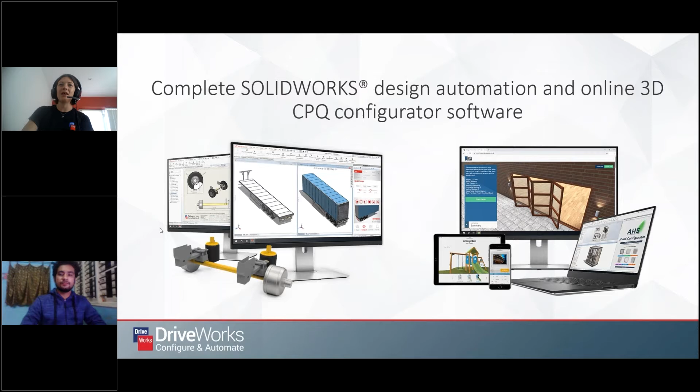DriveWorks is a software solution that allows you as engineers to set up your own design automation tools, and then using that same technology, create a way to specify new products or versions of your product. We're going to talk more later about these different versions of DriveWorks, but it basically allows you to automate your whole design process and make it a lot smoother and easier.

So today we're actually going to focus predominantly on DriveWorks as a design automation tool. It can be used as a CPQ tool as well, so you can do online selling and have an online platform with DriveWorks, but that's the high version of the software. Today we really want to focus on the core design automation, and how you guys can get started automating your design process as soon as we finish this call and start saving some time.

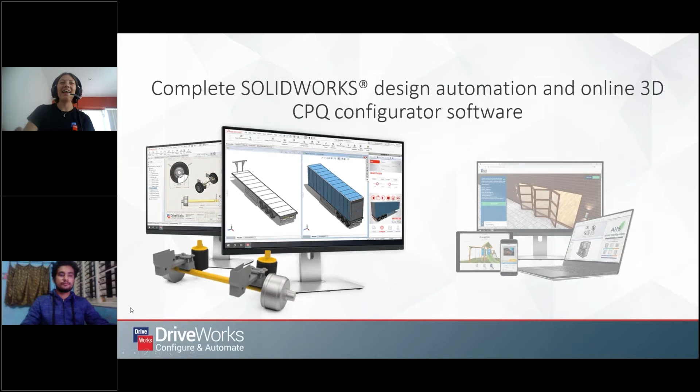DriveWorks Express is free for all SolidWorks users. It's included inside every license. This means that you can go into SolidWorks, activate your license, and then just start using the software straight away. So all you need to do is a 6-step process: open up SolidWorks, go to Tools, Express Products, DriveWorks Express. You click on the link for My SolidWorks, you'll get an activation code, paste it into the box, and then you could just start automating from there. It's really easy to do, but I'll make sure I send out further information after the meeting so you can get started straight away.

So how does it actually work? It's entry-level software, the basics of design automation, so it's really easy to get to grips with. But it basically allows you to drive values into your dimensions. You can suppress and unsuppress features, or even delete whole parts from assemblies if needed. It's perfect for small projects because it's very simple to set up a project, and it does the 3 core functions of design automation.

So that is capturing your information that you want to change, capturing those dimensions such as length and width, capturing different features, so it might be materials, something like that - those different aspects that you want to drive later on. You can even automate the custom properties or drawings for each new variation of your model.

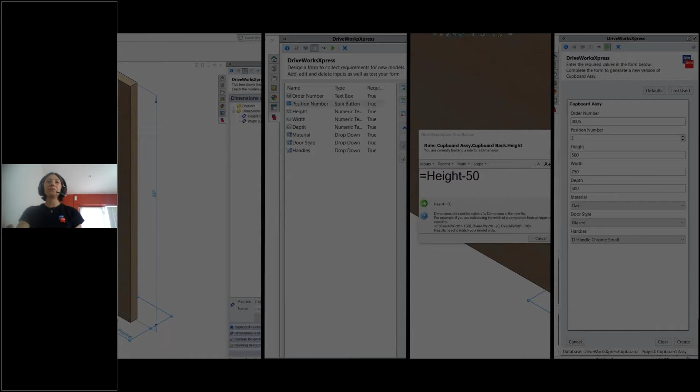So that was quite a whistle stop tour, so I am going to go into it in a little bit more detail. As I said, the first step is capturing those design parameters - capturing your length, capturing your width, capturing whatever you want to change on your model. This is basically telling DriveWorks which components you want to create new versions of and what you want to control or change inside of those components.

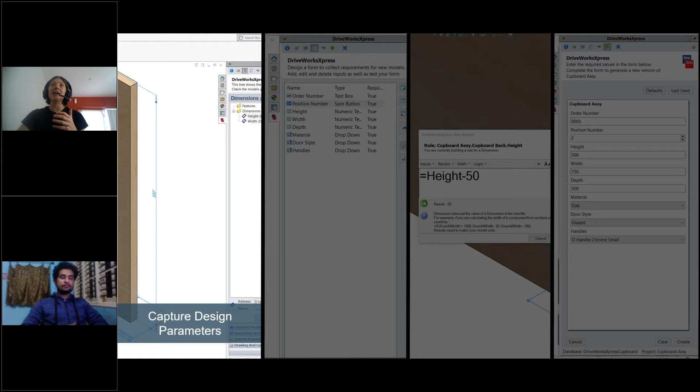You'll then move on to creating your input form. So again, those are the options of what you're going to have on your form. Are you going to have the order number, so you know what order number is going to be changing each time? Is the option going to be the height? Is it going to be the width? Is it going to be the depth? What are those controls as well?

For example, you might design doors as your product. You might know that your doors can never exceed a certain length, so they might never be able to exceed 3 meters, and can't be smaller than 1 meter. So you can put those controls in to say that the option is going to be between 1 meter and 3 meters, and your customers or whoever's inputting the values in the form can select between those options. So it helps there with error control and that kind of thing.

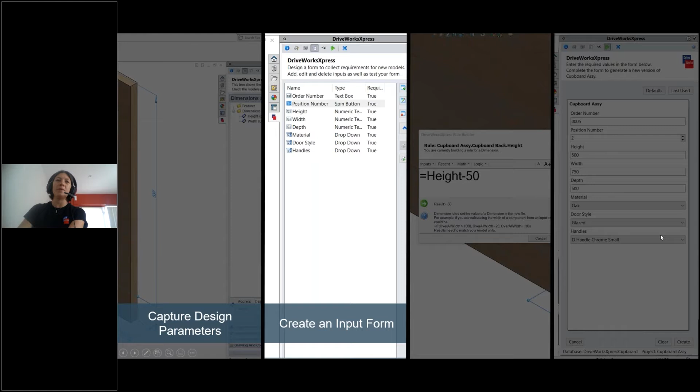There's also different types of form inputs, which I'll show you in more detail during the demonstration. The next option is actually writing your rules.

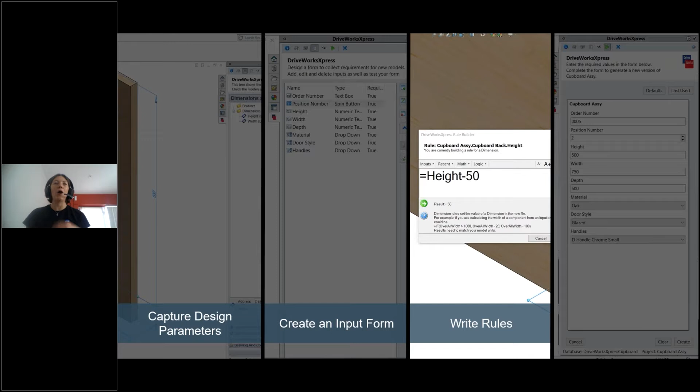Rules are what DriveWorks is all based on. It's the integral part of DriveWorks, very similar to Excel rules, so you might have things like if statements or different types of logic. It's essential for matching up those captured design parameters with the inputs on your form, and then being able to create the full DriveWorks project. When we go into the demonstration, it'll become a lot clearer how rules actually operate within DriveWorks.

And then the final stage is just running that project as many times as you like to create all of those wonderful new variations of the same model that you originally started out with, but doing it a lot faster.

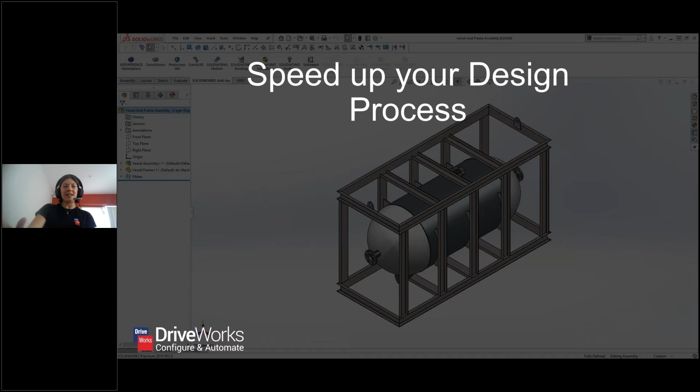So how is this going to actually benefit you? The first one is it speeds up your design process, which is very important. We're all very busy people, so we don't want to be spending time doing really boring, repetitive tasks. Before DriveWorks, you might have that initial inquiry that takes X amount of time, but then the actual design process could vary from 1 or 2 days, longer or shorter. It can be quite a lengthy process.

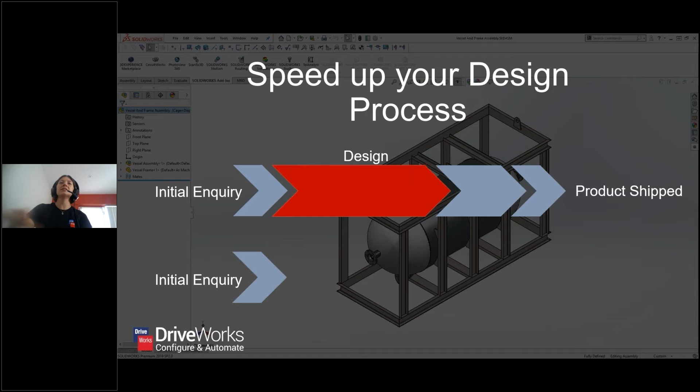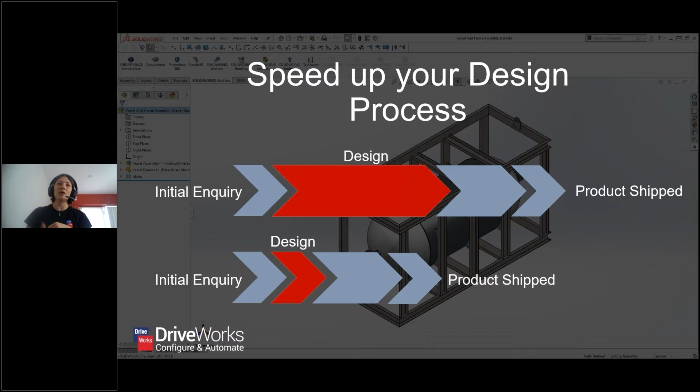And then obviously you've got to get the product shipped. Whereas if you have DriveWorks and you've automated this process, your initial inquiry time takes the same, but then your design process is cut down massively, which means you can get your product shipped faster, which means your customer is a lot happier because you've managed to get them their product a lot quicker. It means you can then do more designs, more research and development, get more orders out, so your boss will be happy because you've managed to sell even more this year. So it really does speed it all up.

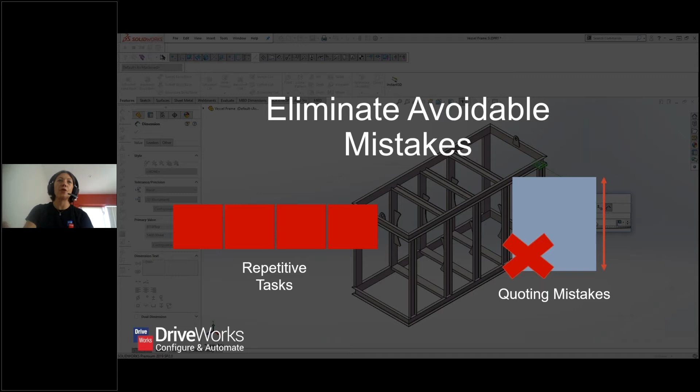The next one is eliminating those mistakes. We are all human beings and we can make mistakes. So if you're manually designing everything, it's a lot more likely to make mistakes, whereas if you use DriveWorks, it's an automated system, so it's not going to make mistakes. Repetitive tasks also make mistakes happen, like quoting mistakes. These can be costly to a business and really affect the time taken to get those models out and your products created.

So the last one is freeing up engineering time. As engineers, I imagine you all really enjoy designing and doing fun tasks, but you don't want to do those boring, repetitive ones every single day. Get rid of those, and then you can do all the fun things you originally studied to do, like working on new projects, developing existing products, and automating even more. Getting that fun stuff done is very important, and that's what DriveWorks will allow you to do.

Moving on to DriveWorksXpress in general, this is another view of how it actually works. As you can see from the image, we're inside SolidWorks. We've got our product, a scissor lift. Say that's our original model, and over here you can see that from that original project we can create all of these different variations instantly using DriveWorks because it's automated the whole system.

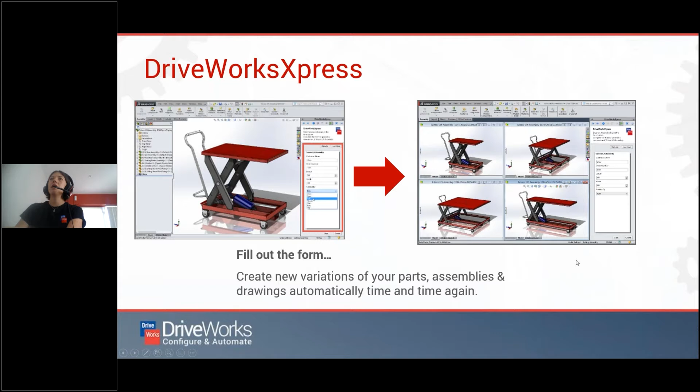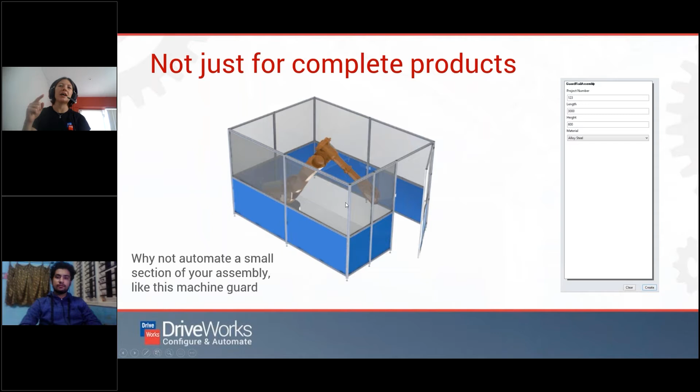DriveWorks isn't actually just for complete products, but it might be that you need to automate a small part of your product. For example, you might need to automate the machine guard because that's something that only changes a little bit every time you have a new model. So you might want to automate that, and even if you just automate that process, you're still saving yourself a lot of time because it's only changing by a bit of length or width each time the machine changes, but it means you're not doing that boring task of redesigning it every single time.

So again, even if you can't automate your whole product, just automating a little bit and saving yourself a little bit of time will really go a long way in the future.

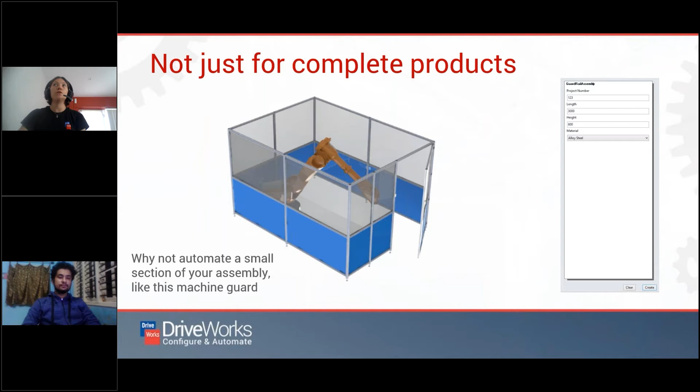So now I've talked at you quite a lot about DriveWorks, but let's actually see it in practice. The best way I thought to do this was to record the video earlier of me doing the demonstration, so it's easier for me to talk over it, and I know there's going to be no errors because I've already done it.

Hopefully you can all see the video now. Again, we're inside SolidWorks and we're going to get started. So I'll just talk you through all of this. I'm inside SolidWorks, and I've already activated my license of DriveWorksXpress, as you can see here, but it's also found inside Xpress Products, DriveWorksXpress.

Now, if you can remember from earlier in the presentation, the first thing that I'm going to need to do is capture those design parameters that I want to change every time. So that's the first thing we're going to do.

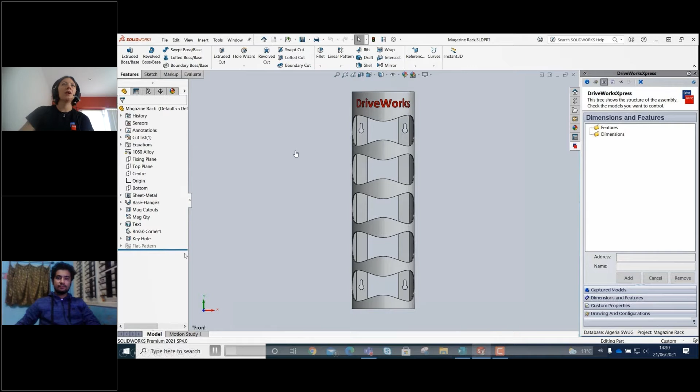I'll go over to the design tree here. I've got my captured models, my dimensions and features, and what I'm going to do is double click here because I want to capture the width and the depth. They're the two things that I really want to change on this magazine rack demo. So I can easily capture them, click add, and they appear here underneath the design tree. Really quickly, I've managed to capture both of those features. I've double clicked on the base flange, I've found them, they've gone instantly underneath the dimensions folder, which means that I now know that the depth and the width of this model is captured, which is super important.

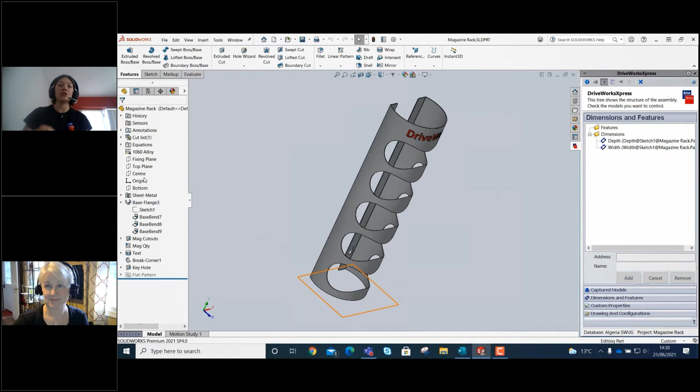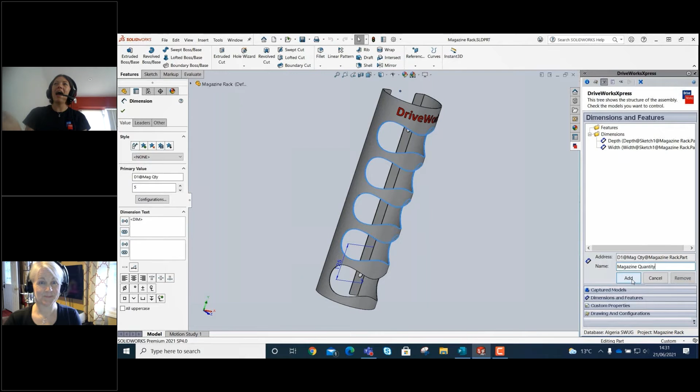So the next step is for me to actually capture the magazine quantity, so how many magazines I will want to see inside the rack. I can capture that really easily, get my spelling correct, type in what I want to call it, which is magazine quantity, and click add on that one. Again, that dimension has appeared instantly underneath my dimensions folder, meaning that I know instantly that extra dimension has been captured. So for now, that's all I want to capture for the dimensions: the depth, the width, and the magazine quantity is all I need right now.

But I also want to capture a feature. Now the feature I'm going to capture here is the text. I want this text that currently says DriveWorks to change every single time. So if I am doing magazines for myself, I might want to call it Bridie's magazines, or I might not want to have any text on there at all. So later on, when I'm building my rules, I'll want to be able to change that.

Oh, I can just see that my colleague Heather has joined us. So I'll just, as we're in a pause, say hi Heather. I'll just wave. Thanks for joining—we're only just getting started, Heather, so it's all good.

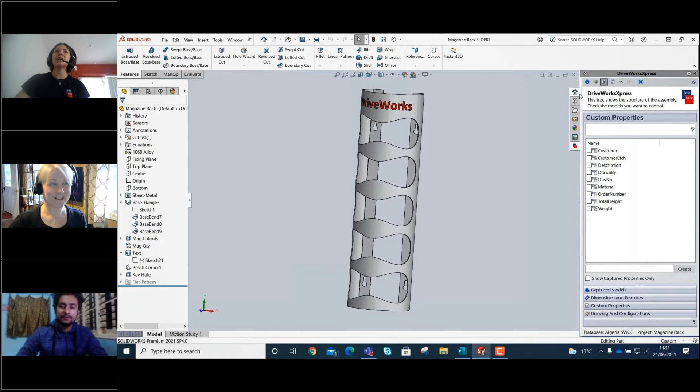As you can see here, I've got my feature captured, my text, and my dimensions captured really easily. Now the next thing I'm going to capture is custom properties. I don't want to capture them all, there's only a few that I want, but I'm going to quickly go through so I can easily check off what I want to capture, which is customer, the actual customer text there, who it's drawn by, the order number, and the total height of the model. I can see they're all checked off. That's done, they're all captured.

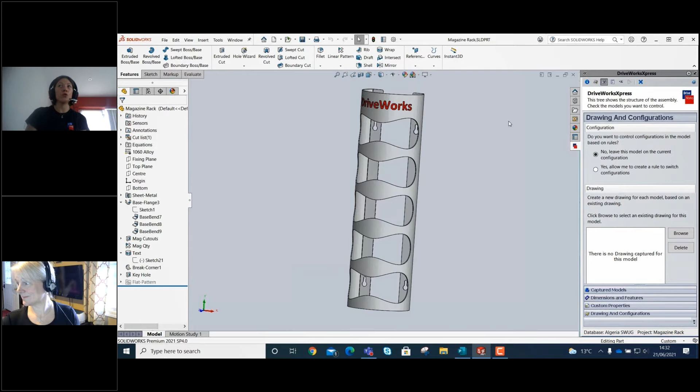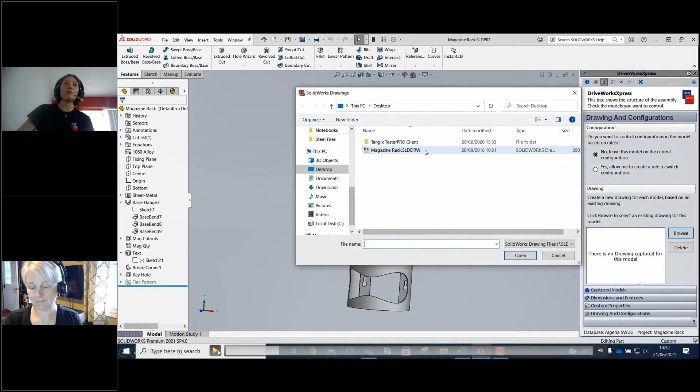Now, the final thing that I want to do, after I've captured all of those, is actually capture a drawing, because every time that I create this model, I want to have a brand new drawing. It will save you so much time further down the line, because I know that this drawing is correct, it's error-free. So I'm going to capture this SOLIDWORKS drawing for the original magazine rack and make sure that design updates every time. I can just quickly open that up, and I can see that it's captured there, and that is all done. So I've captured my dimensions and features, my custom properties, and my drawing.

So let's move on to building that form, which is a really important part. When you're building your form, there's lots of different inputs that you can have.

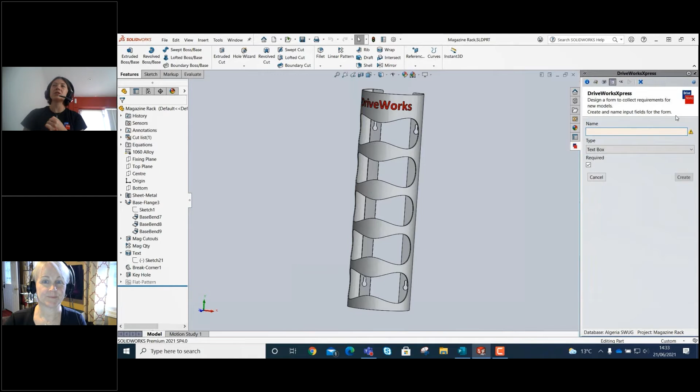You might want to have a text box if it's something like the customer name, that obviously just needs to be a text box. Just simply put in some different text in there. So it might be, you know, Bridie's the customer, or it might be Prasad's customer, Heather the customer, that kind of thing.

I might want something like a numeric text box, so obviously I've got my depth and the width, that's going to have to be numbers that's inserted into there. I might have a spin button for different options, and we'll get to see all of those throughout this form building process. But the first thing I'm going to input is my text box.

What it's going to be is for the customer name. So that will obviously change each time. So that's required, I want to make sure that that is always captured. The next one is going to be another text box, and that's for the order number. Again, that's obviously going to change every time that I have a new order.

I can test my form to make sure it's working. So you'll notice here that when I've not input a value, I have a warning message saying, you need to put a value in here. Again, it's really helping with that error, sort of combating those errors and making sure that we're not having wrong information input there.

So I can just test it really quickly. I put Bridie in, I put my order number in. That seems to work. I'll get rid of those and go back to building my form.

So the next control is actually going to be a checkbox. And this is going to be for this text here. So do I want to see this customized text? Yes or no. So it's going to be customized text required, and I can say yes, I want text on the model, no, I don't want text.

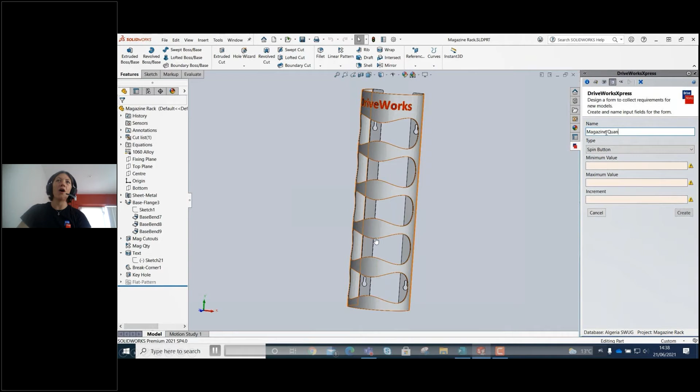Moving on, it's going to be a spin button this time. And this is going to be for the magazine quantity, so how many of these different options for magazines I want to have in there. I might just want 2, I might want to have 3, I might want to have 10. So I'm going to put a minimum value, a maximum value, and the increment of 1.

Next, moving on, we're going to actually use a numeric text box here, and these are going to be for the width and the depth. So the first one is the depth. I never want it to go under 150, and my maximum value I want it to be 250. So I know when I've done that, that my engineers or designers, whoever it is, can only use options that are more than 150 or less than 250.

And you obviously will know your models, the better you'll know which design parameters to put in there. Another numeric text box I'm going to include here is for the width. So this is going to be between 200 and 500 because I know that, again, my model can't have a width less than 200, but it can't have one over 500. Again, I can create that.

And I've just got, I think it's one more control to create. And this is going to be a drop down because I want to know who has designed this model every time. So I'm going to put a lot of different options in here, so I might be one of the designers to choose from. And it's just a pipe bar here. It might be Ollie, it might be Laura, Tom, I think I've got one more, and Will. So currently in my business there's 5 different designers, and I can choose from all of those.

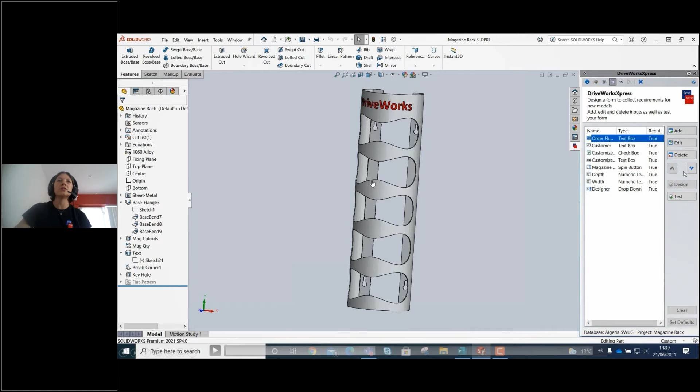What I'm doing here is actually the option to be able to move different controls up and down. So you might want the order number to feature at the top, or you might want the customer. You can change those around when you're building your form, so you're not just stuck with that original format that you've decided on.

Again, I can test my form, but what I'm actually going to do here, and you'll see how this is beneficial later on, is create some default values so that every time I go back to my model, they're the values that are naturally inserted. It'll make it easier when I'm building my rules, and you'll see that really quickly when we go to the rules builder.

You can see I've got these warning signs telling me what I need to put in there. So type in a value for the order number, type in a value for your customer. Do you want that text? I'm going to say yes for the default. It might just say magazines. The default for the quantity is going to be 5, 150, make it very easy for myself, and then 200 for the width. And then I'll say that I think it's me that is the default designer, obviously. I can set those defaults, and we'll go back to that shortly.

So already we've done step 1 and step 2, we've built that form. All we've got to do now is complete step 3, which is our rules builder. As I mentioned earlier, rules are integral to DriveWorks, where DriveWorksXpress is a rules-based software, and you'll see the importance of it shortly, but also how easy it is to set up those rules, to match together those captured elements with those controls in that form input to create this DriveWorksXpress project that will hopefully save you lots of time. So we move over to our rules builder.

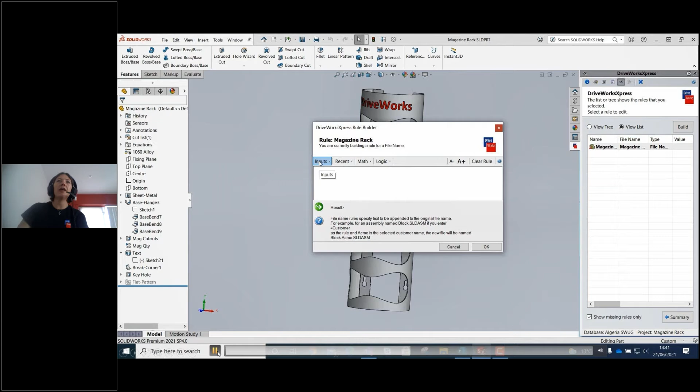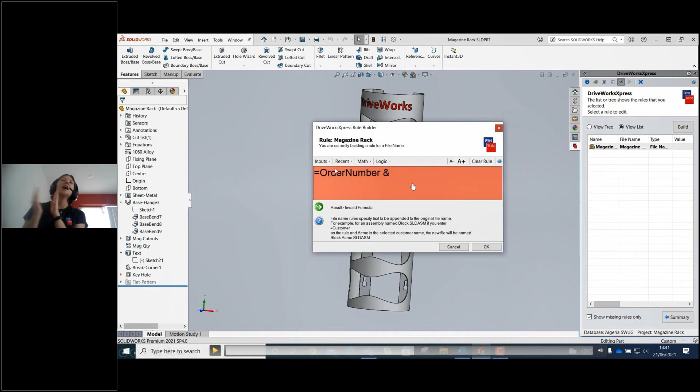What I'm going to do for my file name is, like I said, have the order number with an ampersand, and link it with the customer name. What you will have seen there is that the box at the back goes red. The reason it goes red is because DriveWorks is telling me that this currently is an invalid rule.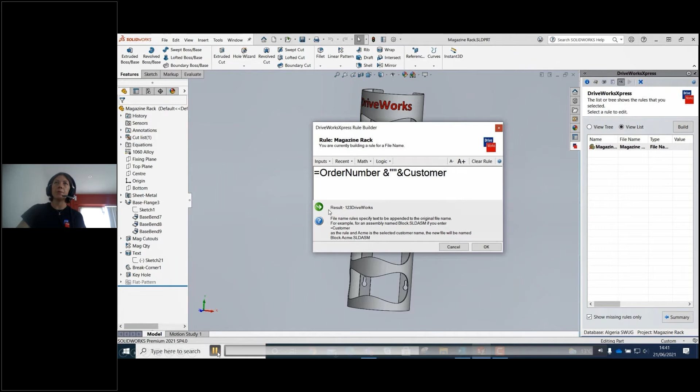So it makes it that our rules are always built correctly, because we'll know if there's something wrong there. So I can carry on adding in order number and our customer, and then we can see here, when we did our form inputs earlier, our default values are 1, 2, 3 DriveWorks, so I know that rule has been successfully created, which is why we wanted to make those default values. So our first rule is created, super easy.

I can go back to my summary now. The next thing I need to do is actually build rules for our custom properties. So really easy, I can just expand those. I've got that customer, so I need to link customer to the customer input, so DriveWorks is what it was in the default. That's created, super easy. Exactly the same for the order number.

Let's link that order number rule, order number capture, to the order number of the custom property. Drawn by, again, link that to the designer, which was the input. I was the default value there. That's okay, all easy. Now the next one is going to be for this customer etch.

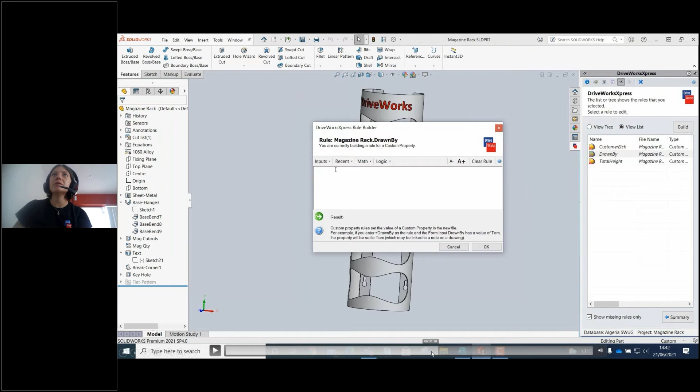Now this, oh, sorry, my computer's not enjoying things today. Apologies. I did that one. Let's go back.

So the next one is going to be for this customer etch, so it's this text at the top here. Now it's a little bit of a slightly more tricky rule, but nothing too crazy.

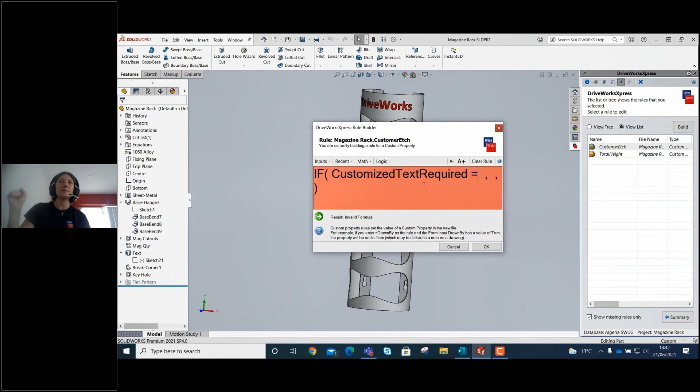So it's going to be some logic, and it's going to be an if statement. So if that customized text is required, if I check yes on my text box, true, I want that customized text. So if it equals true, we're going to input the customized text, which is magazines. If it's false, we haven't clicked it, we don't want to see it.

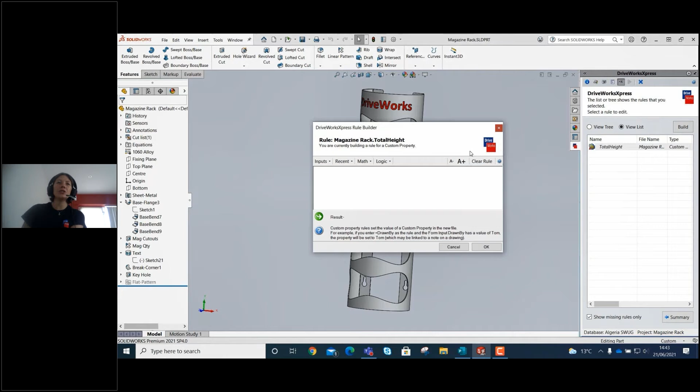So that's a really easy if statement, and it's created that rule for us. The next one is for total height. Now this is a little bit of logic that I wouldn't worry too much about. It's just something for this particular demonstration, but it's basically going to give me the overall height each time. So it's how many quantities in the magazine multiplied by 125 plus 75. The result for this one is just going to be 700, but don't worry too much about that rule.

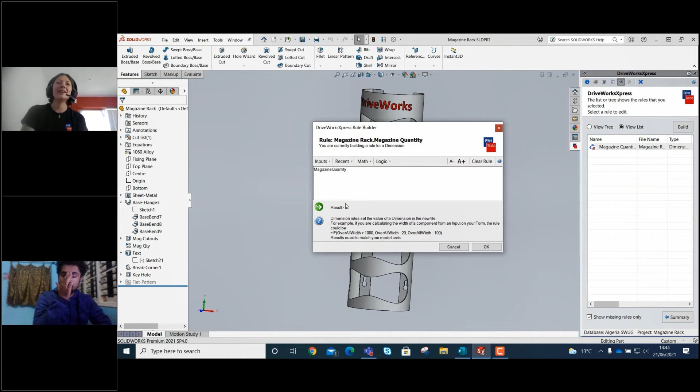We've just got 4 left to create. So we've got the dimensions. If you remember the depth, the width, and the magazine quantity, we can match that depth dimension to the depth input. Exactly the same for the width, 200. There we go. And we're going to do exactly the same for the magazine quantity. Super easy, as we can see. So we just have one more rule to create, and that was for that feature.

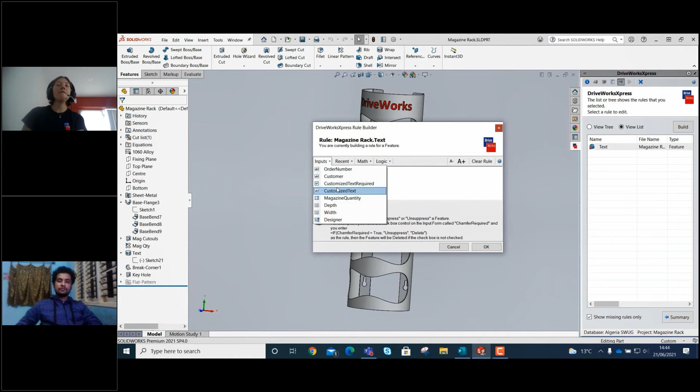So that was for that text at the top here that currently says DriveWorks. We just need to make sure those are connected, so that feature is connected to the actual input for that. So it's another if statement, another if customized text required equals true, like we had before, I want them to unsuppress that feature. However, if it's not true, I want them to keep that text suppressed. I don't want to see it.

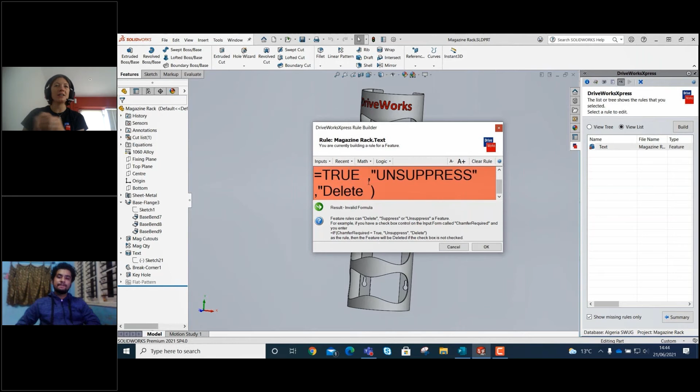So as we were talking about earlier, DriveWorksXpress allows you to suppress and unsuppress different features. In this case, it's the text. In your case, it might be the material of your model. As we can see, we've got no red boxes there, so we've done everything, we've captured it all. We've created our input, and we've built all those rules. So all that's left to do is actually build our different versions of our models.

There's a couple of examples here, and you can see just how easy it is to create. So I'm going to do a different order number. Let's say SolidWorks has decided to commission a magazine rack. We'll call it Bridie's Magazines just for fun. The quantity, let's say it's going to be quite a lot, so it's going to be 7. We're going to have 200 as a depth, and we're going to go quite wide and have 300. We'll say that Laura designed this one, and then we'll click create.

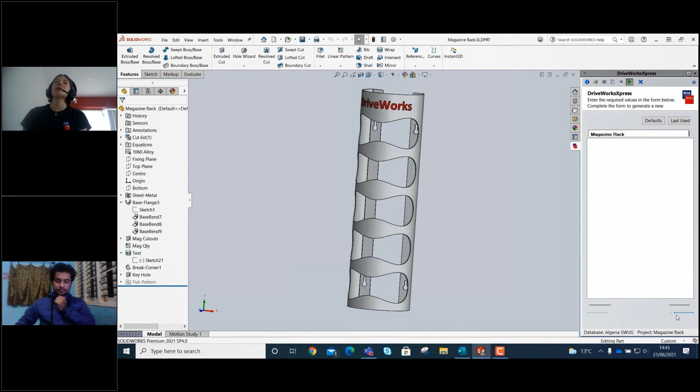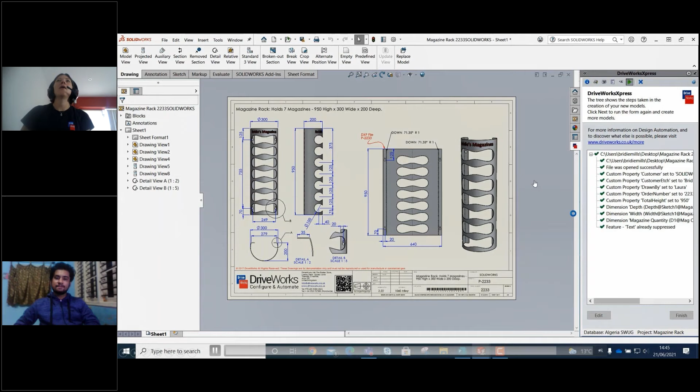What you'll see now is DriveWorks working in the background, creating this brand new model. It's updating those there, everything's checking off correctly here. It's creating it all. You'll see the drawing, a brand new drawing being created there. Again, super easy. All those new values, so you've not had to go from scratch to create that drawing. It's just done it automatically because you captured that as an option originally.

And that's it, that's completed. So that took me 10 minutes to create that project, and it's taken me about 10 seconds, 15 seconds maybe, to create a brand new model. So really, really easy, as if by magic, really.

And we're going to, just to check that you all believe me, do another example. So we'll go back again. We've created that wonderful model, but actually I've got another customer that wants something very different. So we'll change that order number, we'll change who it is. Actually, no, SolidWorks want more.

I don't want text this time, so we're going to actually keep that feature suppressed. We're going to change the quantity to 2. It's just a very simple model, this one. Lower depth and still that quite wide width. We'll say that Tom's the designer this time, and we'll create.

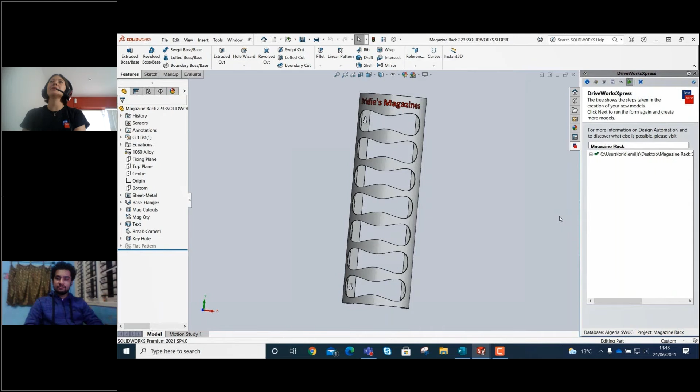So again, DriveWorks is going back, it's recreating this brand new model from scratch again. We can see that that drawing's been updated, so another brand new drawing's been created there. Again, super easy. We've got, and then instantly, we've got this brand new model here that's completely different.

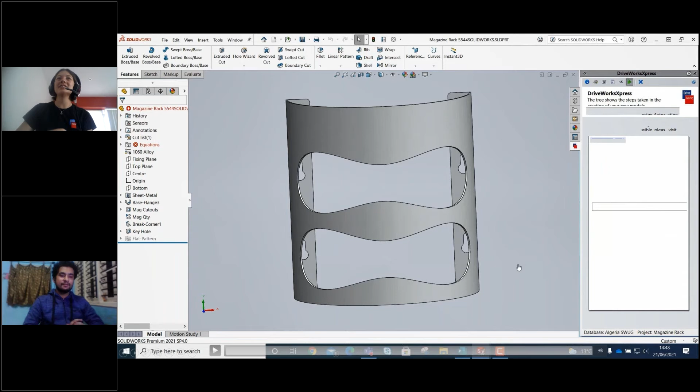Again, you can see the brand new file name rule at the top, which I think was 5544 or something like that, showing us that it is a brand new model. So hopefully that has explained a little bit further how to create your own DriveWorksXpress project and made it really easy, so you can get started straight away.

So now that you've seen how to create a DriveWorks project, you might want to have a look at some resources to further your knowledge.

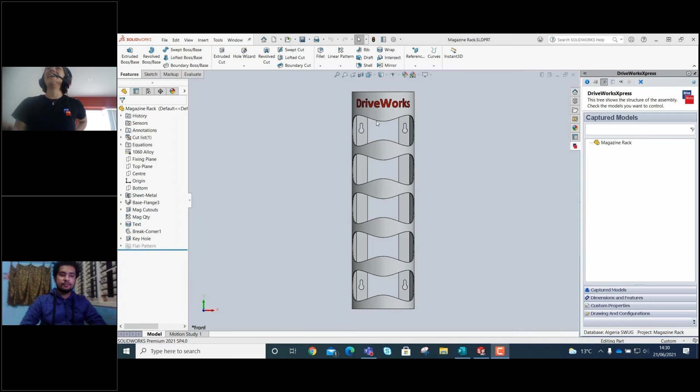We actually have created a lot of free resources. Oh, sorry, I just saw something flash up here - the left panel showed a warning in an equation. I'm not 100% sure, but it's nothing to do with how DriveWorks is actually working. It's because an equation for this demo needed to be created, so it makes things a little confusing sometimes. I do apologize for that, but it won't happen with your ones - it's just the equation thing getting in the way on this demo. I blame whoever created it, which wasn't me.

So if you've not already done it, you can access the DriveWorks community. You can create an account inside DriveWorks, and it'll give you access to all these wonderful resources for free.

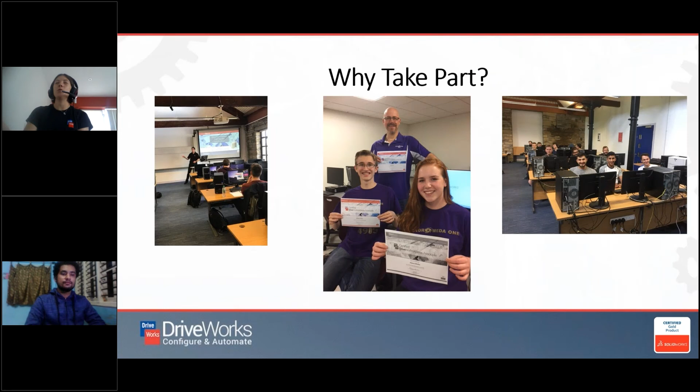So, really easy. There's just 3 steps: following a tutorial, completing the certification, and in the end improving your employability, having an extra certification, knowing more about DriveWorksXpress and design automation. I'll send this link out also to Prasad, so you've got access to it instantly.

Now I kind of wanted to move on. Obviously we talked about DriveWorksXpress, you've all got access to it. You can all go to Tools, Xpress Products, DriveWorksXpress, add it in, start automating straight away. But there are different levels to DriveWorks software, depending on what you want to do, and the requirements you'd have for a design automation or, in the future, a CPQ project.

So Express, we talked about - entry level, all free. DriveWorks Solo is the next step up, and you can access a free 30-day trial of DriveWorks Solo, which is great because you can instantly download it. You don't have to put any credit card details in, but it gives you a lot more functionality - things like better quote generation, more advanced forms, drawing and model control, that kind of thing. You can have a go with it for free, and there is actually a free certification for it.

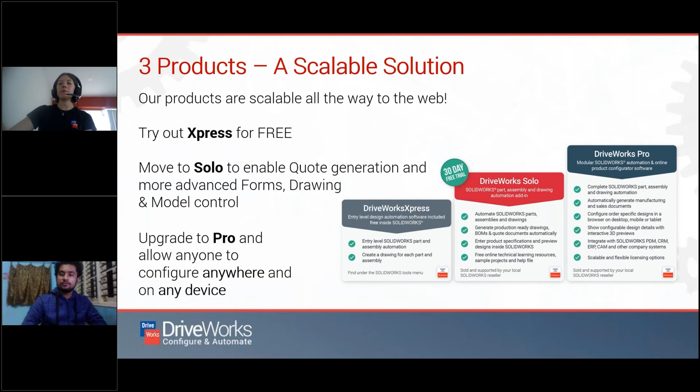And then DriveWorks Pro is top level software, allowing things like integrations with your ERP systems, SOLIDWORKS PDM, obviously much better drawing control, that kind of thing. Also having the ability to have an online configurator, a CPQ solution up there also. But what I'll do is focus a bit on Solo now.

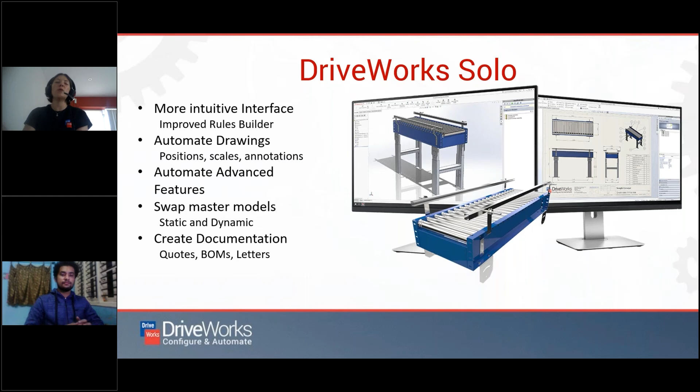It allows you to do a bit more than DriveWorksXpress does. You can automate your drawings, swap master models, create documentation such as bill of materials, letters, quotes, that kind of thing. The rules builder is a bit more intuitive. You can all have a go with DriveWorks Solo for free, really easily. It's quite a nice step up if you've used DriveWorksXpress quite extensively and want to see what's going on with Solo. Just download the trial and have a go. I'd really recommend it - there's also a certification.

So if you're taking DriveWorks Solo or on the DriveWorks Solo trial, you actually have access to the certification for free also. During those 30 days, you can go through the training and become fully certified in DriveWorks Solo. So again, adding another free qualification onto your resume, onto your LinkedIn, just for your general knowledge, which is great. You don't need a full license of it - you can use the trial and have a go at getting your certification. So you're getting 2 for the price of 1 there.

And then Pro is actually a multi-user environment, top level, quite advanced. There's different modules depending on what you need to do. Do I need an online configurator? Yes, I use DriveWorks Live. Do I need to have different people in the engineering office running different forms and different specifications? Probably DriveWorks User, and you need to set everything up within Administrator. So this is just different - obviously the top level - but you might want to have a go with it further down the line.

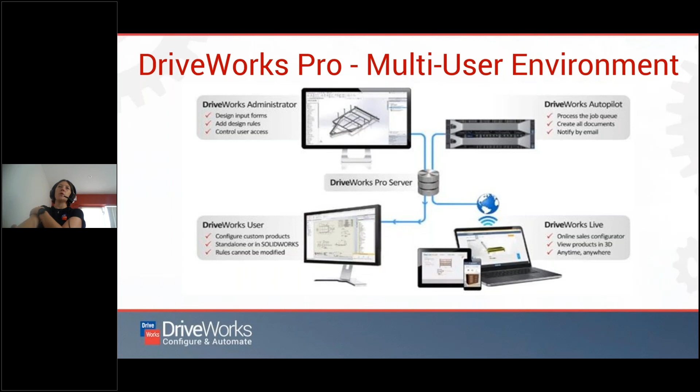It's just good to know about.

I've just seen someone has put one in the chat: is there any offers for startups? We would always recommend having a go, obviously you've got Express straight away, so start using that, start small with an Express project, then go on to DriveWorks Solo and use that free trial. As we're a company based in the UK, we sell worldwide via the SolidWorks reseller channel, so we would always work really closely with them with regards to any offers. It is on a case-by-case basis. I'm afraid I don't have anything concrete to say yes or no, but it has happened in the past. It's just that it'll need to happen via your SolidWorks reseller, on what they decide upon.